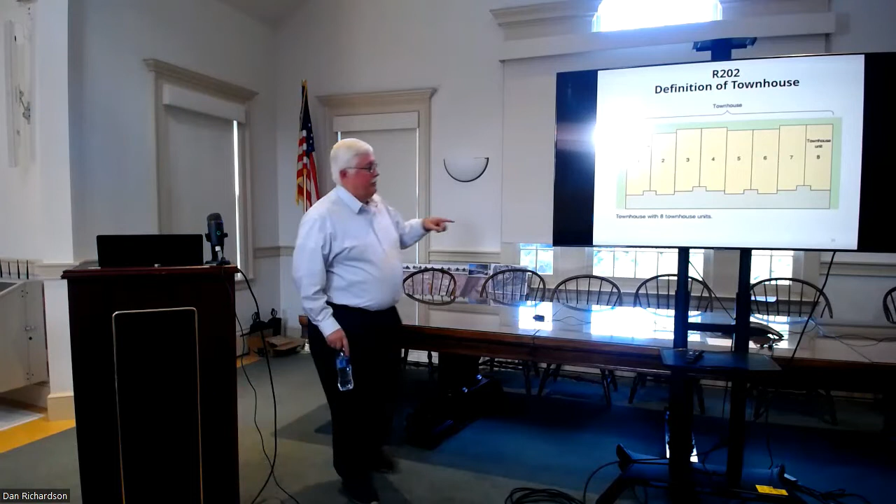Instead, you have to be open to a public way or yard on at least 2 sides of that unit. Notice it doesn't say how much of it. So in a typical plan, you might see the entire rear wall, the entire front wall of the townhouse unit exposed. But the reality is, developers these days and architects are all trying to make things denser.

And so they start to have townhouses overlapping and these buildings having corners, turning corners. And so how much of an outside wall needs to be exposed to still call it a townhouse and have it fit within the definition of the IRC. That's being debated now in the code change committees for the ICC.

At some point, we'll probably see that, because theoretically, maybe only 4 feet of a wall would be exposed if all I needed to meet the minimum code requirements are emergency egress windows out of basements, bedrooms on the back of the house. And so if I stack one window over another window, how wide is one? 2.5, 3 foot window, need 4 feet of wall, and then I can have another unit overlapping it, and still call it a townhouse by the definition right now.

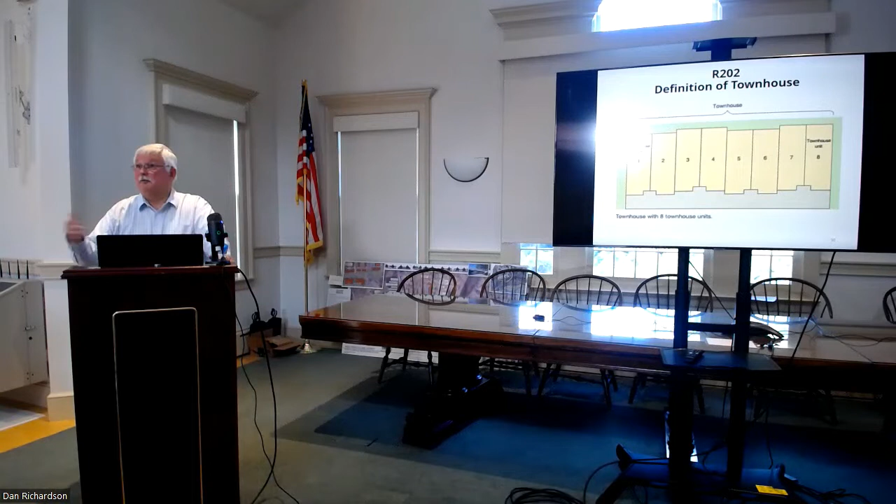So they're saying with the code, we need to define this better to see for firefighting purposes and other safety reasons, how much exposure is really required.

If you've always wanted to build a house out of shipping containers, and believe me, there are some that are very anxious to do this, it is now perfectly possible, because in the 2021 edition of the International Building Code, there's a new section 3115 that describes how you can make a building out of a legitimate intermodal shipping container. As long as it's got a certificate and you know where it originates from, those meet certain standards. All those things you see sitting on ships and outside of Long Beach, they all meet the same standards internationally. So they're a known structural entity.

So if somebody wants to take that and turn it into a house or a building, they can do that, and we can put certain holes in it. So the rules of the road are there in the International Building Code. So basically what this section is saying is, if you want to use shipping containers to make a residence, have at it, but go to section 3115 of the International Building Code. We're not going to fill up pages at this point. We've got to go by it.

Protection of openings in section R301.2.1.2. So the basic rule there says that exterior glazing in buildings located in windborne debris regions shall be protected from windborne debris. And the definition in the code of a windborne debris region says within 1 mile of the coastal mean high water line where the ultimate design wind speed is 130 miles per hour or greater.

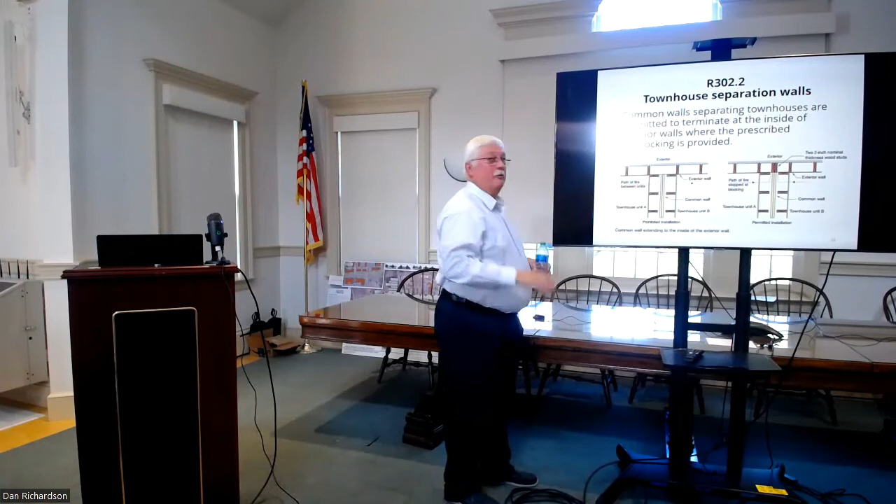should extend to the back side of the sheathing there. Sometimes builders don't do that - they stop here, thinking that's the end of the wall. So what the code is now explaining is you can't do this unless you add blocking. If I put 2 2-by's in the wall in line with that 2-hour separation wall, that fire blocking will satisfy the code.

And you can stop the fire separation wall at the stud line between the 2 units. If you're aware structurally, national design standards for wood construction indicate that the char rate for wood in general is about 1.5 inches per hour. So theoretically, two 2-by's is giving you 2 hours.

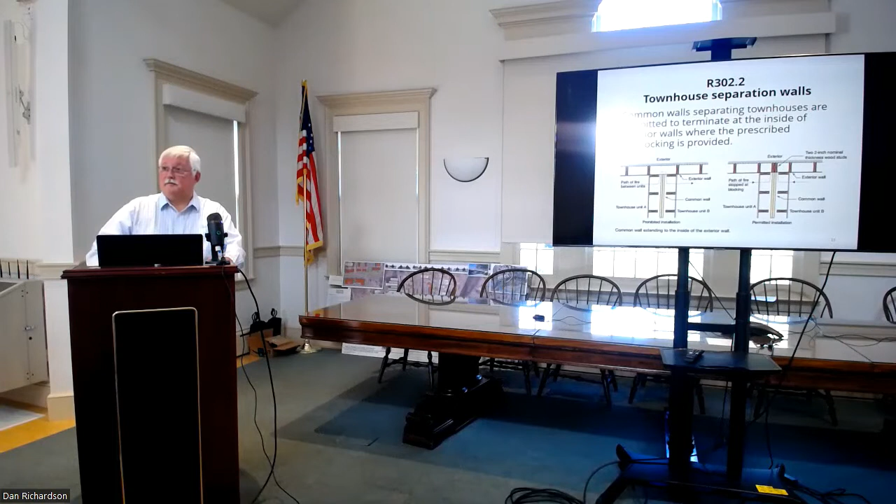There's a little tweak here between dwelling and garage fire separation. All the basic rules you already know about 5/8 type X gypsum board being required between the habitable space of the house and the garage are still the same. But there is one exception: if you're using heavy timber, like post and beam type construction in residential design, you get an out of not having to wrap those individual posts and timbers if they happen to be in the wall or in line separation between the living space and the garage. So the tweak is, instead of saying type 4 construction, which is what heavy timber is called in the International Building Code, it's now going to call it type 4 HT for heavy timber.

That's only because if you're an architect or someone who deals with the International Building Code, you'll see in the new code that there's now 4 kinds of type 4 construction: type 4 A, B, and C, and then type 4 HT. Type 4 HT is the one we've always known. A, B, and C have to do now with mass timber and CLT structures, where they're getting much bigger, taller buildings made out of wood.

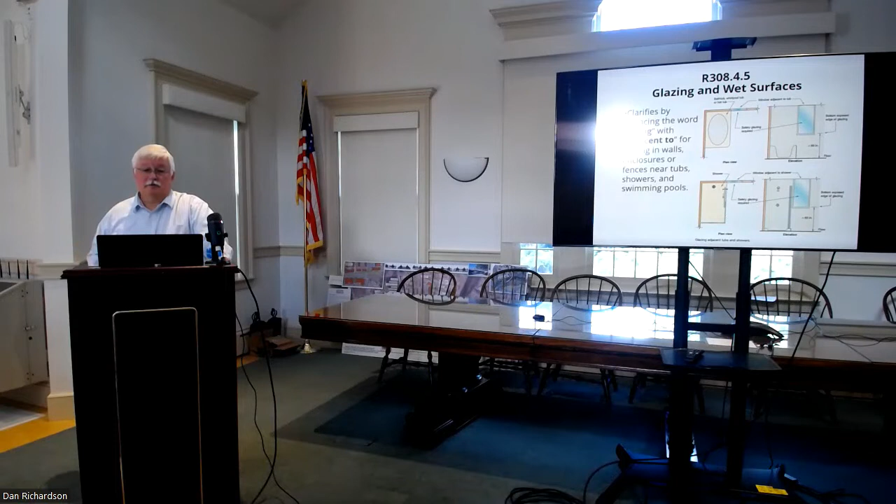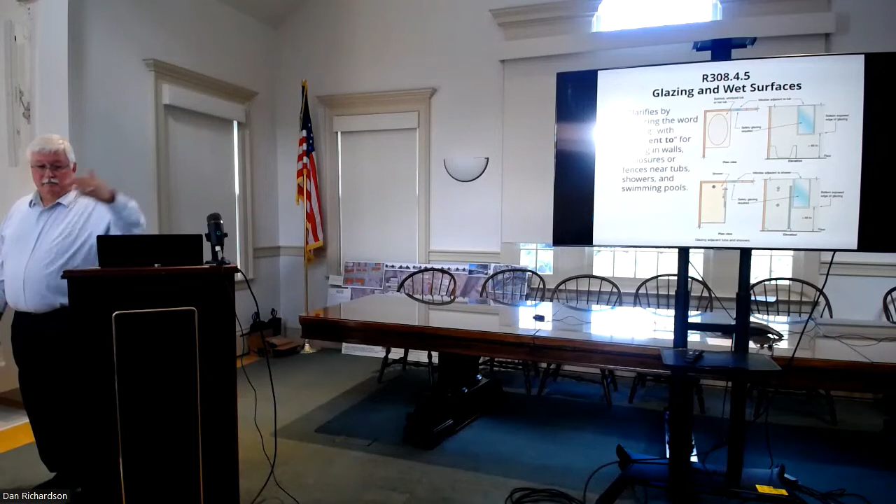In section 308, where we talk about glazing and hazardous locations where safety glazing is required, they're making a change in a word so that when it has to do with glazing near tubs and showers, instead of saying facing the tub or shower, it's now going to say adjacent to. So it's not just when you step out of the shower and there's a window there that I have to worry about how high the bottom of the glazing is and how far away it is before I've got to put safety glazing on it. Now, if there's a window here, a window here, if it's adjacent to the tub or shower, the same rules apply.

In section R310, means of egress, we have the same rules we've had regarding emergency escape and rescue openings where they're required. That hasn't changed. What's being adjusted are the exceptions of where they're required. The first two we've already known, there's no change there. But number 3 is an addition.

The exception says a yard shall not be required to open directly into a public way where the yard opens to an unobstructed path from the yard to the public way. Such path shall have a width of not less than 36 inches. So the code says, if I have to escape out of a window, just like if I have to escape out the front door of the house, I have to be able to get to the public way, which usually is a street or a driveway or a parking lot, some kind of public space.

So what can happen, especially in a townhouse development or zero lot line type developments, is that the yard in the back of the unit may be enclosed by a fence, or there's exclusive rights to ownership and use of that backyard, maybe theoretically legally on land. I get out the window, I'm in a yard, but to get to the street I have to cross stuff I don't own, or there's fences in the way. So this is saying wherever you escape out of a house, including out of windows, you have to be able to get to the public way. There has to be a defined path.

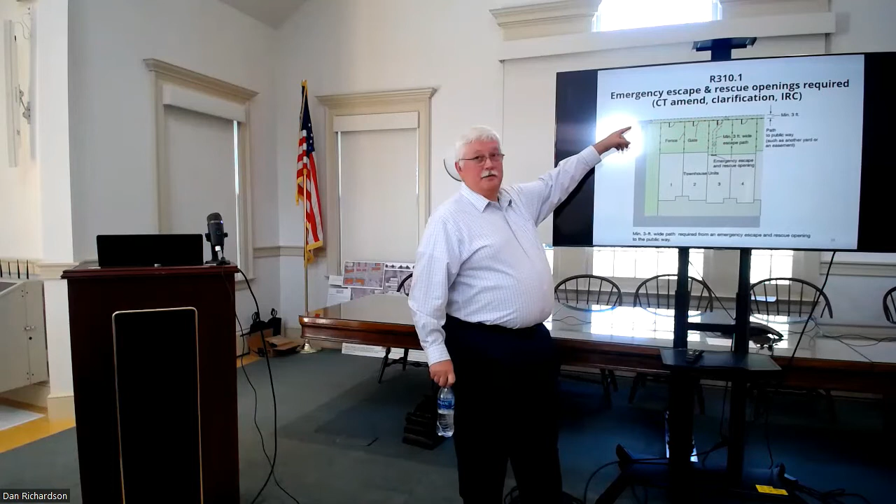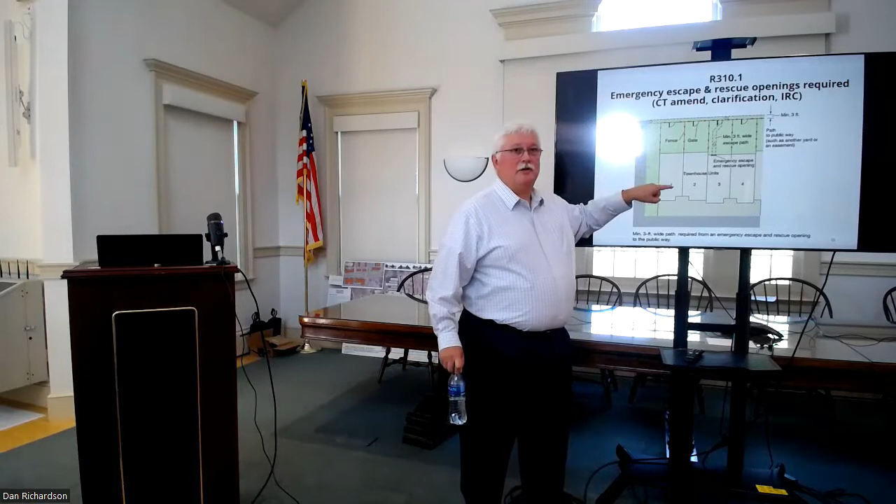So if I have a situation like this, where I may have these landlocked yards, someone in the planning is going to have to create this minimum 3 foot wide access way to get to a public way that has an opening from all these yards. In most cases it's never going to be an issue on a simple lot that you're building on, but there can be situations where it gets tricky -- you say, where do I actually go once I'm in the yard? And you don't have a place to go.

They are also modifying the situation for when we have emergency escape and rescue openings that are, let's say, out in the basement, underneath a deck or a porch, or maybe you want to build a deck.

There's a bedroom in that walkout basement that has an emergency escape window, but I want to enlarge my deck. It's now going to be over above that window.

What do you do? The code tells us you're going to need a minimum of 3 feet in height to basically be able to crawl out from under the deck or porch. And at that window, you're going to need a window well or areaway that's at least 3 feet deep. And if it's more than 44 inches high, that well, then I'm going to need a ladder or steps to get myself up onto that level area to crawl out from under the porch or the deck.

So just picture a 3 foot tall space basically. Once you get out that window, you've got to be able to have a clear 3 foot area all the way around to escape.

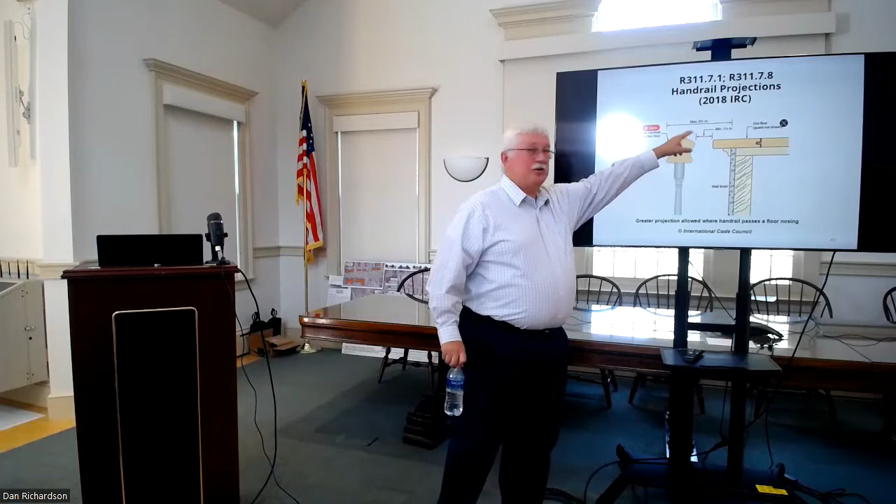If you have an adjacent nosing that's projecting out, I still have to have the 1.5 inches so I don't bang my knuckles. And now I'm allowed to come out 6.5 inches passing.

This just keeps going up - the maximum stair rise between landings. So if we're a straight run of stairs, in the previous code, the code we have now had already increased it from 144 inches to 147. And now it's going to go up again from 147 inches to 151.

That's only because the rooms get bigger and what we're using for floor joists, be it I-joists or floor trusses, are getting deeper. And people want 9, 10 foot ceilings on the first floor of the house. But then they don't want the intermediate landing for some reason. They just want straight run stairs, and so the code is just trying to deal with that.

So with respect to risers, in the code currently, it says open risers are permitted, provided that the opening between treads does not permit the passage of a 4-inch diameter sphere. So it's sort of a solid riser, right? You can't have more than a 4 inch space on that riser. It's got to be a little less than 4 inches. Somehow you want to have it somewhat full.

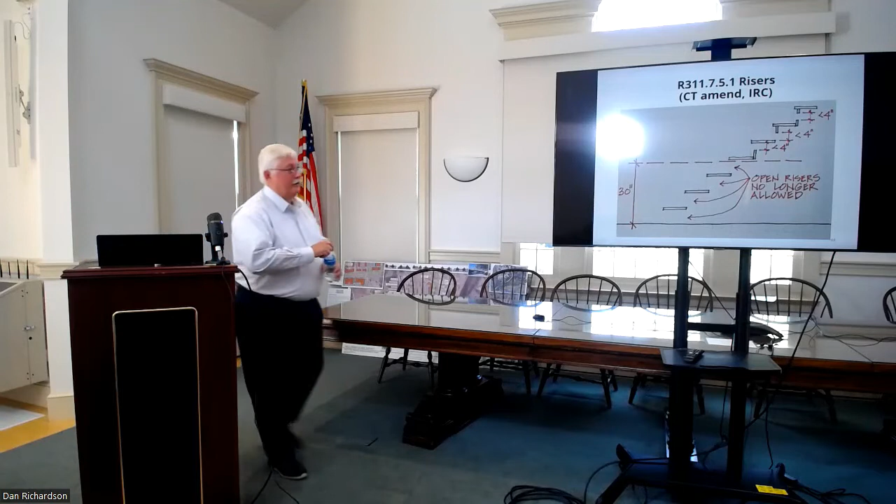And then the stairs went higher after that, and I close those off. You can't do that anymore - they're taking that exception out of the code. They put in that basically you can have open risers like you would normally on spiral stairs, but on regular stairs, there will be no open risers even for short ones. So something like this will no longer be allowed, where up to 30 inches I could have open risers, and then above that I had to have less than 4 inches. Now it's going to all be this.

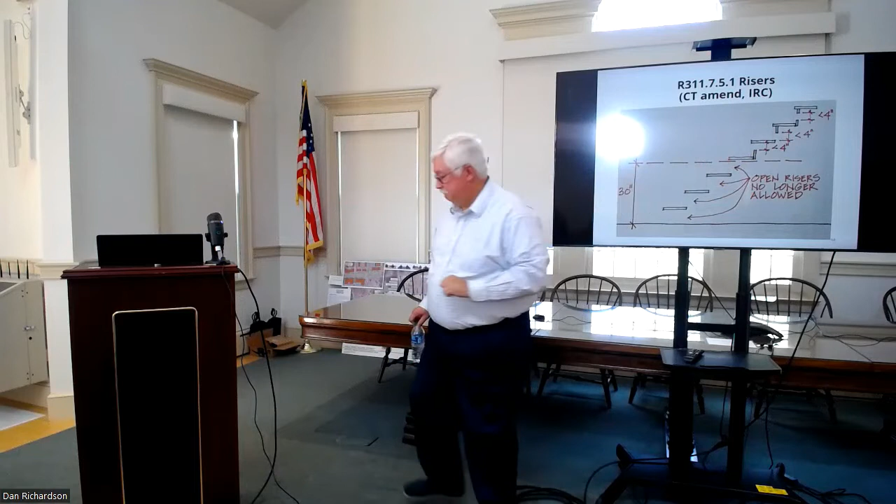It's attached to the house, yeah. It's part of the IRC, yeah.

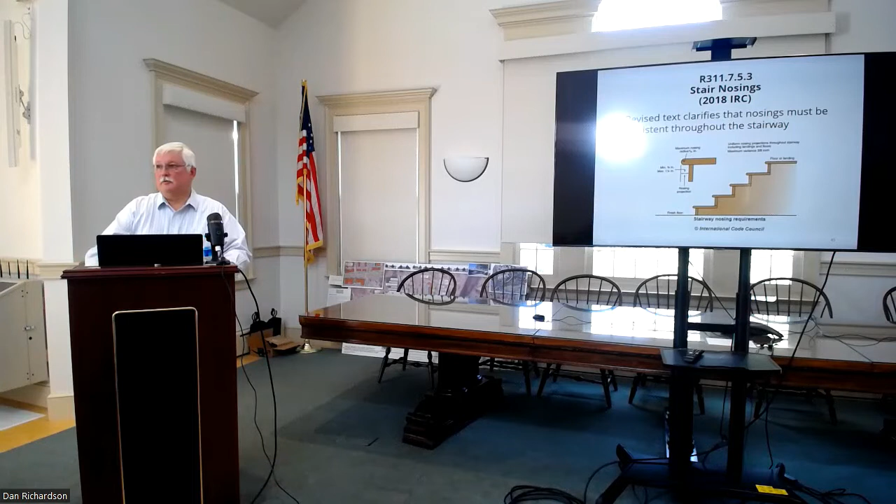Stair nosings. This was added in the 2018 IRC. There's already language we're used to in the code that tells you how consistent your rises and treads have to be, right? How much variation you're allowed, 3/8 of an inch in the flight. There was never any language about, well, what about nosings? And so now this is just adding in that you have to have uniform nosings, and they're using the same 3/8 rule with respect to the nosing projections going up the stairs.

In 2015, with the 2015 IRC, we had introduced into the International Residential Code the notion of mezzanine, very similar to the language that was already in the International Building Code. So a mezzanine could basically be an intermediate floor level. Let's say you've got this big room here, and I want to have what we would normally call maybe a loft space, but that occupies no more than a third, over no more than a third of the space. And in the building code, I can do that and not call it a story. It wouldn't be the second story of this building; it would just be a mezzanine, part of this story, just another level.

That wasn't in the residential code until this last change. So in 2015, they put in language that would allow you to have mezzanines in houses and not call them stories. So I could have a 3-story house and a mezzanine on every floor, so I could have a 6-level house, if zoning would let me have one that tall, but it was only 3 stories if those other 3 levels were actually mezzanines. And then the code said, you still need a code compliant set of stairs to get out from every level and every floor.

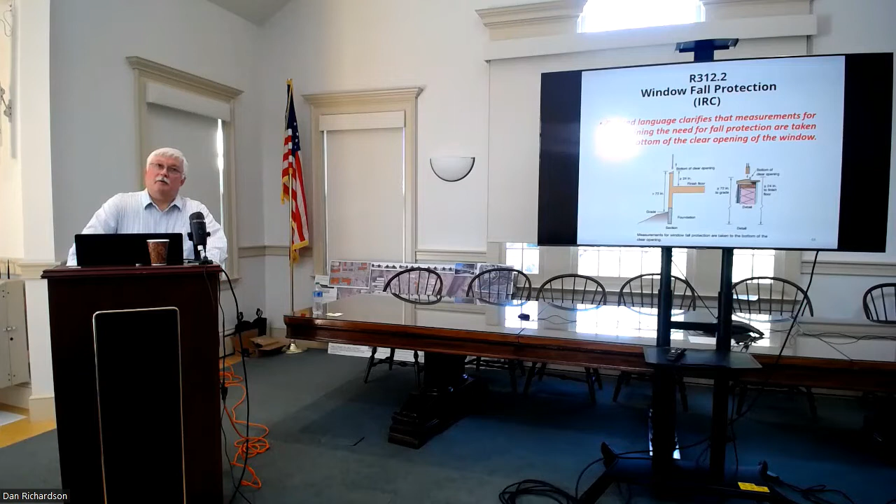Window fall protection. The rules stay the same, about 24 inches on the inside and 6 feet on the outside. You're above that, but you've got to put in windows that have window opening control devices, right, 4-inch rule. The only thing that's being adjusted in the code is where you measure to. So right now the code says sill, and that's 2 different locations inside and outside the window. And it may not be, in this case, a little about a quarter of an inch piece of wood here that's like a stop for the sash. So when this is open, the actual clear opening is measured here instead of here. So that's the only change, to the bottom of the opening itself instead of you picking the sill, which can be different in different places.

In section R314.2.3, this is the state law that was added because these are always reactions to disasters, right? So in a Shippan neighborhood in Stamford, maybe 5-6 years ago, you had the grandparents and the grandchildren that died in the middle of the night, fire in the house. And in the investigation that ensued, there was an open building permit. The house was under renovation. And so the wired smoke alarms were disabled, and they're not sure if there were any temporary smoke alarms that were in the house or working. But, you know, it seems pretty clear nobody heard an alarm in that case.

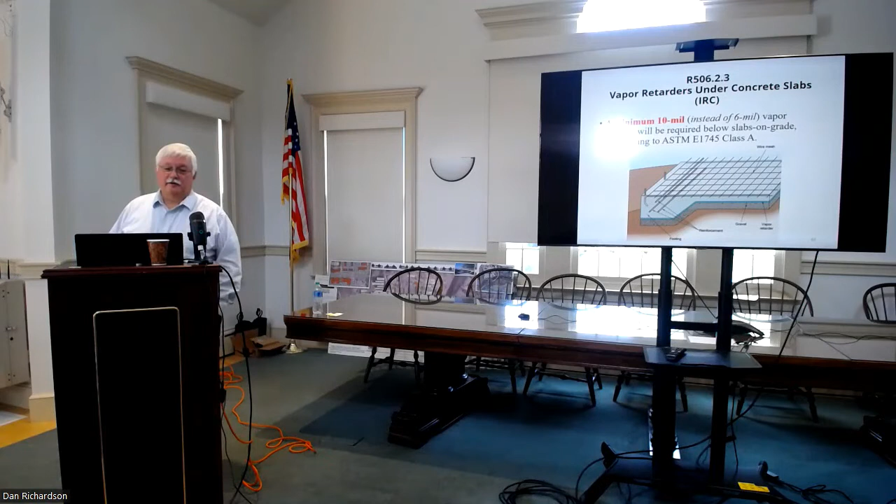In chapter 5, section R506.2.3, for vapor retarders under concrete slabs, it's getting thicker. They're replacing the minimum 6 mil with a minimum 10 mil. I'm told, I haven't checked this out myself, but 10 mil is hard to come by. I bet manufacturers are going to get on board pretty quick and make it available.

In section R507, we're getting more and more information in the IRC about decks. The IRC used to be almost silent about decks, where there wasn't much of any information. Maybe you could figure out the joists for the deck, but that was about it. Gradually over time, they're introducing more and more information, and so you can pretty much build a deck now from the IRC.

So we have in section R507.3 now footing sizes for decks. This was something that was really just a seat-of-the-pants thing before. Someone would sketch out a deck and show an 8, 10, or 12-inch sonotube, and you'd ask how they came up with that. Well, for the last 20 years I've been building decks and they've never sunk, so I guess that works. There was no real source of information to know how to size that, and it wasn't in the building code. But the reality is, in many cases, they were totally inaccurate.

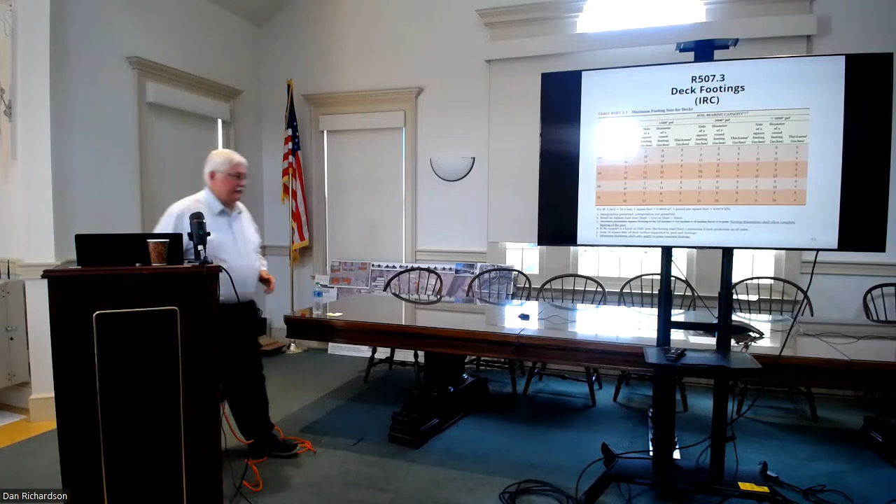So to avoid needing a design professional to figure out deck footings, we now have a table. It goes by live load or ground snow load. In Connecticut, we don't have any areas where the snow load is higher than 40 pounds per square foot, and the code requires a live load for people occupying a deck of 40 pounds per square foot. So we'd stay in the top part of this chart, the 40 pounds.

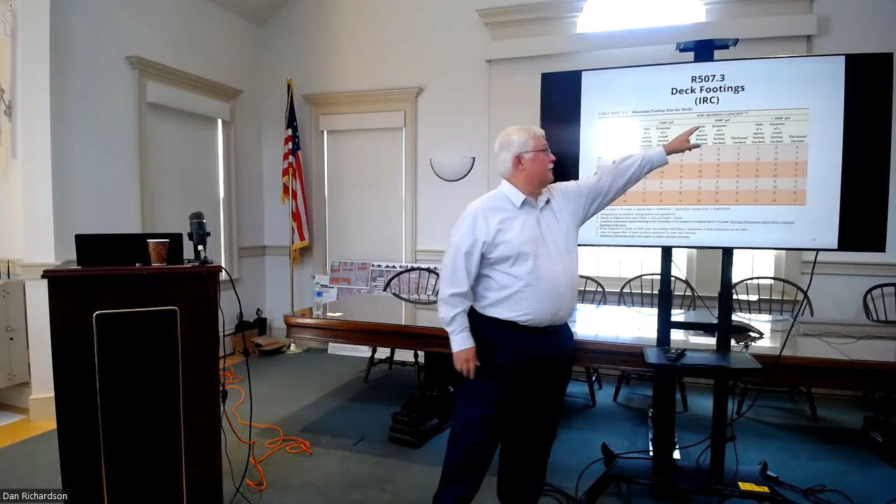Then it asks you for the tributary area, so you have to look at the deck plan and see how much of that deck will be carried by the post and therefore that footing. Then you need to know the soil bearing capacity out in the yard. A lot of times the assumed soil bearing capacity that architects and engineers use, if they don't have data, is 2,000 PSF. You might just stay there unless you know you're on ledge or in muck, but short of that, probably 2,000 will be fine.

So now you're able to pick out, not just a code-compliant footing, but a specific size to put on the drawing. Unless you're pretty small, with a tributary area of 5 to 20 square feet where you can get away with an 8 or 9 inch diameter, you're going to be up in the higher reaches for size. They also give you a square foot equivalent, and you can see that since you get more area out of a similarly dimensioned square than a circle, you wind up with a 12 by 12 footing equal to a 14 inch round sonotube.

The footnotes tell us that interpolation is permitted, extrapolation is not. So if I've got a tributary area of 30 square feet, I can go to the middle and figure out what's halfway between 9 and 14 and pick that if I want for my diameter, but I can't extrapolate beyond this size of tributary area. If I'm collecting loads from a greater area of the deck, now that's an engineered act.

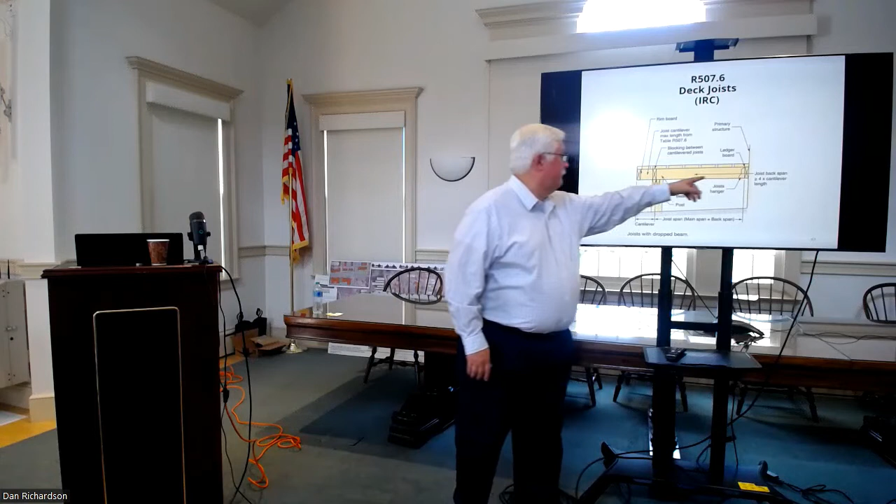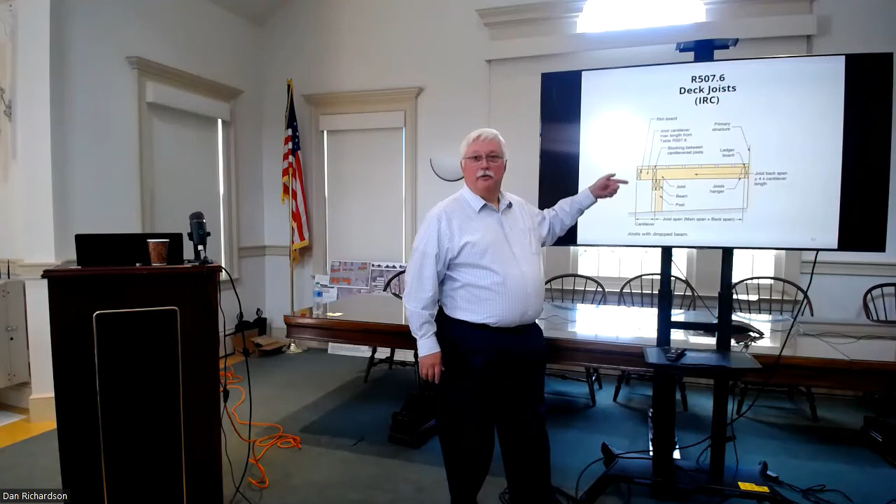What they're looking at for joist span - and this is what we normally think about when we talk about joist span - is a clear distance between points of bearing, whether it's a beam or a wall. We go to the face of that. In this case, with deck joists, they measure from the ledger to the center of the beam - that's your joist span. And the cantilever span is the center of the beam out to the edge of the rim board or rim joist. It's not the actual joist itself, so it's not a clear distance.

In section R507.10, we now have specific requirements about exterior guards, essentially deck guards or guardrails. We had language in the code that told us when we get to a certain height, 30 inches, we need a guard, and we had loading requirements for how strong a guard had to be - that was about it. So it was subject to a lot of different quality guards people would build. Some were kind of floppy, some were real good and stiff, but they were sort of all over the map.

So they've been introducing these changes, done really by the North American Deck and Railing Association, the American Wood Council, and a bunch of other people, and Simpson. Simpson engineers are always involved because they like selling connectors and coming up with solutions. The whole idea is that guards shouldn't just be attached to an exterior joist on a deck, and that's it.

I'm going to push on that deck - I have to meet a certain loading requirement, push on that guard. And if I actually were to use the weight required to do that, I'm probably going to be twisting that single joist, which doesn't have a load path to take care of it. So the idea now is they're requiring this get connected to the other joists so that twisting or rotation is resisted, and the potential load on that guard is being carried by more than just the exterior joist.

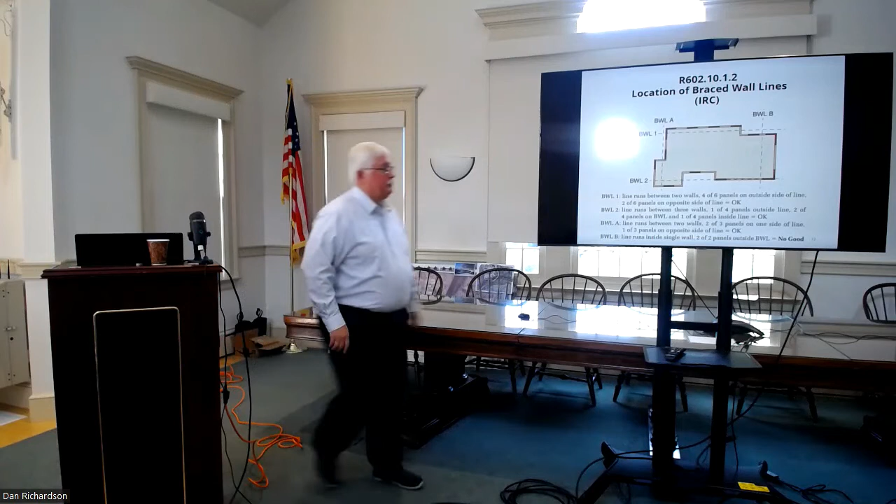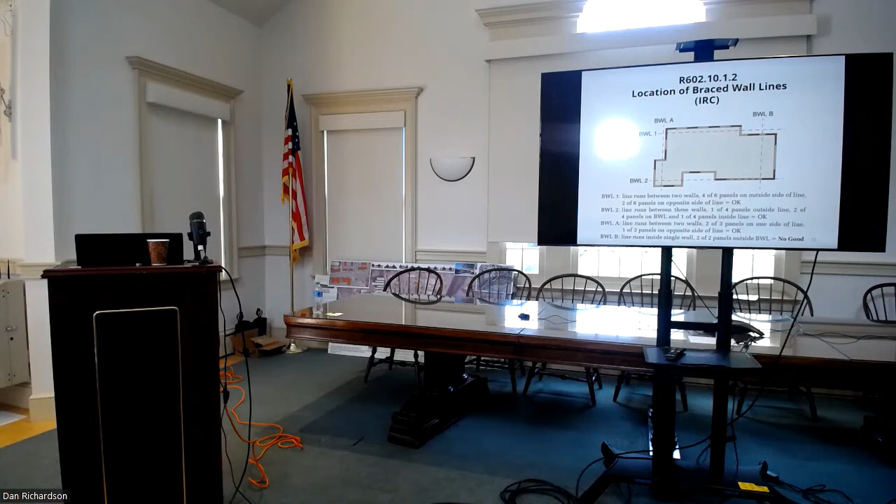Like in this basic plan, we're showing the outside walls, perimeter of a house. And we've got braced wall line 1 and 2, and A and B. And what normally happens, like with these offset walls and such, I could offset the theoretical brace wall line off of one wall or another if I needed to. And of course, the idea is the shorter the spacing between these braced wall lines, when you go into the tables for required bracing length, the load is going to be less, and therefore the amount of bracing is going to be a little less. So you might be in a situation where if I can take and offset this 4 feet over here, and offset this one and this one, maybe I'm getting down where I just saved myself a braced panel.

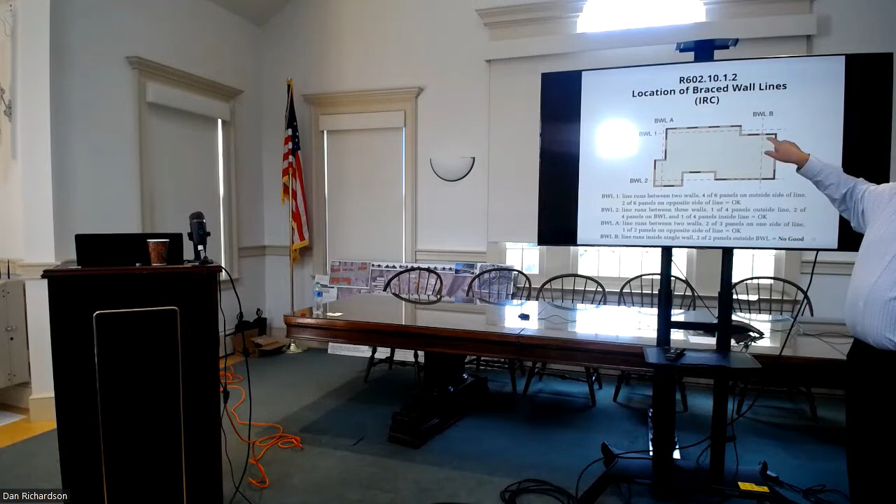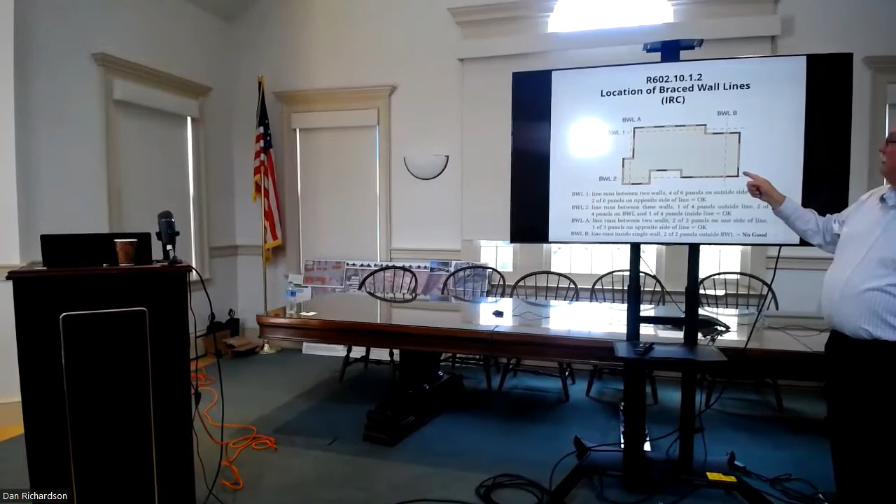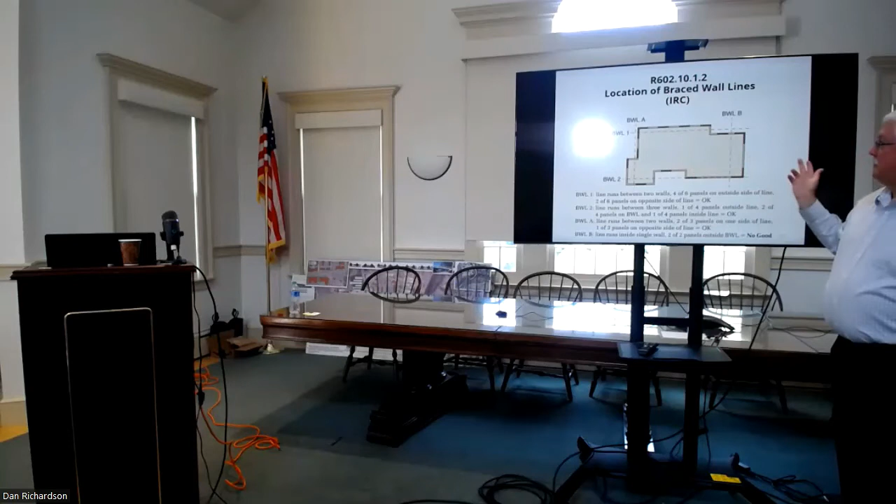Well, in this case, with braced wall line 1, we see we've got 1, 2, 3, 4 braced panels there and 2 here. So I've got no more than 2/3 on one side. So I'm good, I got 2/3 and 1/3, I'm okay. Over here, now that I'm completely offset from the wall, 100% of my braced panels are offset from the wall. Can't do it. So in this case, I have to have the braced wall line right in line with the wall. So that can change, that's basically now changed by 4 feet. That's pretty considerable.

But that's really the only significant change in the wall bracing provisions.

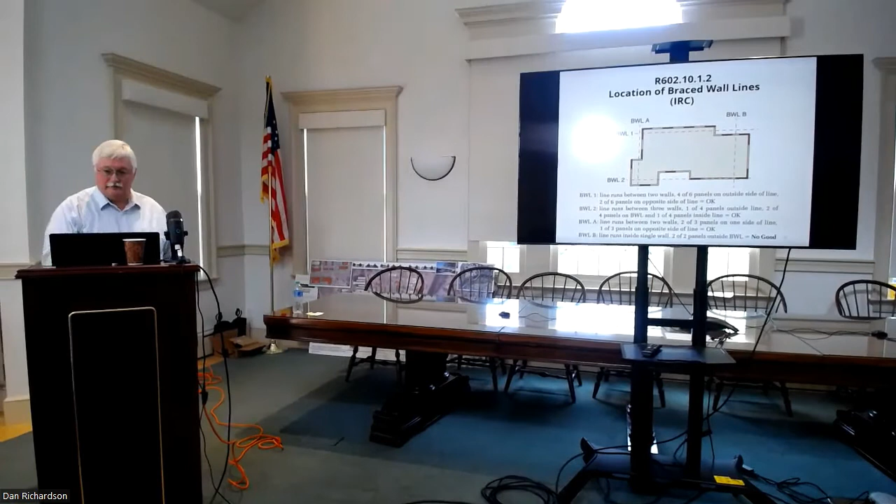Energy code. Oh, we love this. This is what we were all waiting for.

So chapter 11 of the IRC are all of the words that are in the International Energy Conservation Code, the IECC, that have to do with residential. It's just really a copy paste. And so what we see, whenever you look at chapter 11 in the IRC, you'll always see in parentheses another section put there. And all that's doing is it's telling you exactly what paragraph in the IECC, the International Energy Code, this wording is mirrored. So that's all it's telling you. In case you're more of an international energy code guy, you know where it came from.

We have what's called prescriptive, which all that means, the prescriptive compliance option is you simply use the R values and U factors that are in the tables in the book. And if you use those, you're good. That's prescriptive, you do exactly what the code tells you.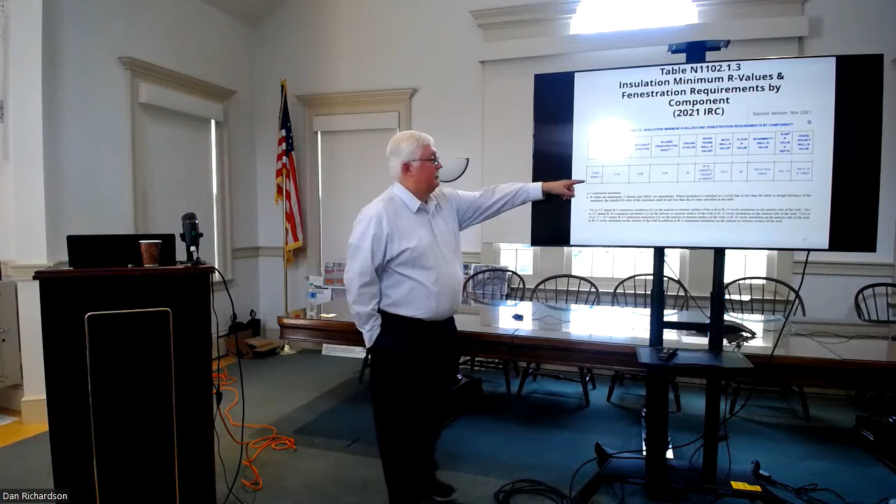Our climate zone is climate zone 5. So our fenestration U-factor will be 0.3, skylight 0.55, ceiling R-value R60.

Wood frame walls - I've got 4 options. In the cavity between the studs, R30, so if you want fiberglass you put in 2x10 studs, or a couple rows of 2x6 and 2x4 studs. Or R20 in the stud cavity and R5 continuous. Or R13 in the cavity, R10 continuous. Or nothing in the stud cavity and R15 continuous.

This is going to make the mineral wool guys happy - they're going to sell a lot more insulation boards. It's just fine as continuous insulation, interior or exterior, as long as it's continuous. Pick your side.

Floors are R30. Basement walls have had an adjustment - it's either R15 continuous, or R19 in the stud bays, or R13 in stud bays plus R5 continuous, for conditioned space. Otherwise, you're going to do R10 and 4. The crawl space has the same requirements as the finished basement.

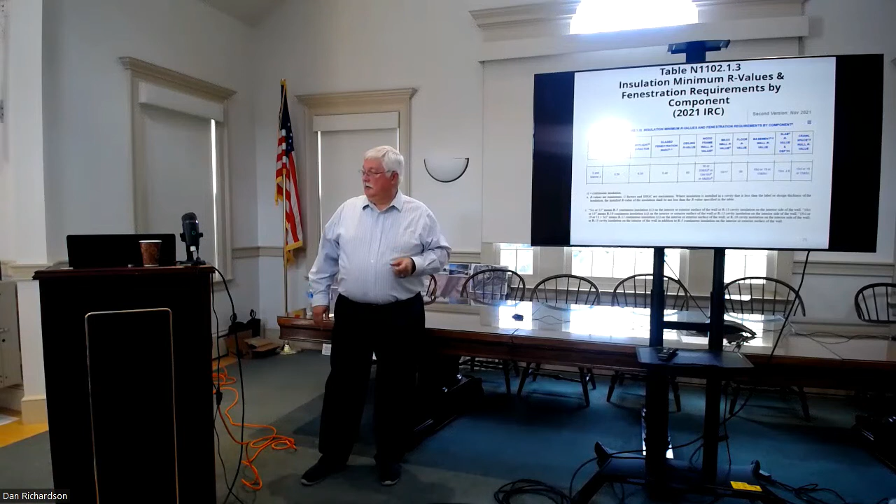Is all of this for new construction or remodel - same R-values? Like I said, if it's a remodel, you fill the cavity. If you want to do this, that's voluntary, and you may get there just because of the size of the cavity you're filling. But this would be for new construction - doing an addition, new walls, new roof.

Okay, so ceiling insulation reduction, section N1102.2. If I have a ceiling with an attic above it, where R60 is required, like in Connecticut, installing R49 over 100% of the ceiling or attic requiring insulation will satisfy the requirement for R60, as long as it's uncompressed everywhere and it goes out to the exterior face of the wall, goes out over the wall.